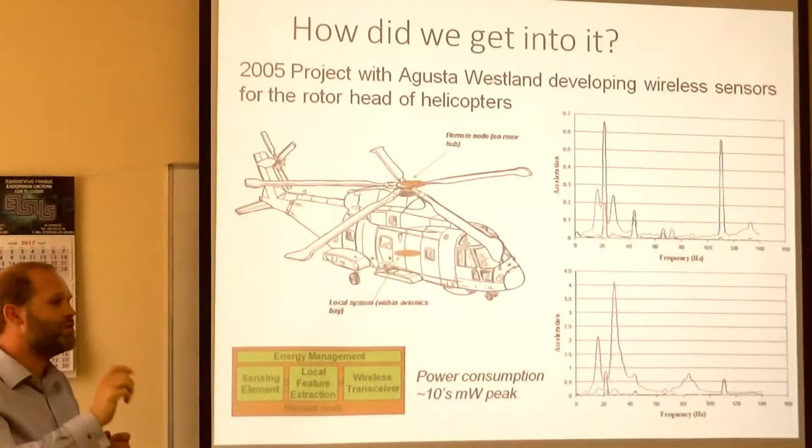In early 2005, we were working with Agusta Westland, a major rotary wing aircraft manufacturer, to monitor the blade, so structural health monitoring of the blades. We were looking at whether we could determine the lifetime, whether we could do health prognostics on the blade. In order to do that, we wanted to put a wireless sensor in the rotating parts that would be embedded for life, for the lifetime of the blade. And then somewhere in the avionics bay, we would have a data concentrator collecting wireless data.

We had an architecture, so there was some sensing element, some sort of feature extraction that was correlating what we measured with wear on the component, and then a wireless transceiver unit. This had consumptions that were in the order of tens of milliwatts, sometimes high tens of milliwatts.

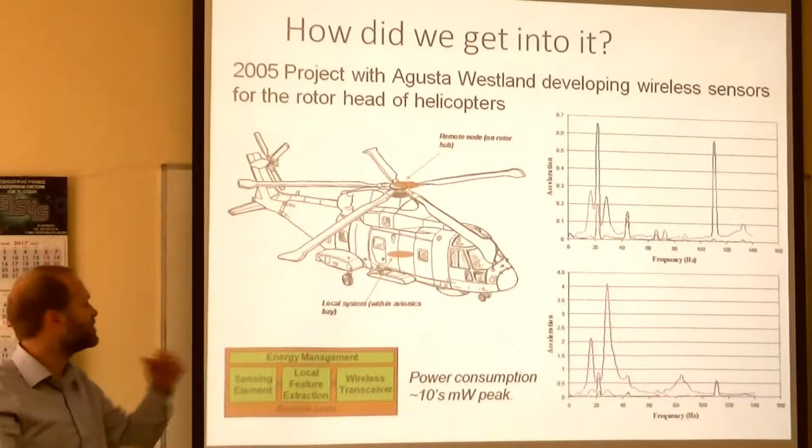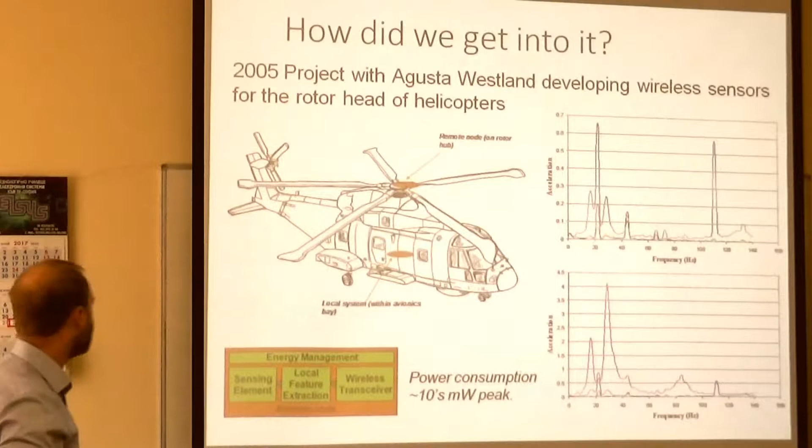When you look at a helicopter, it has a great deal of vibration. So it seemed to make sense that we could use these sort of vibration levels. These two graphs show the vibration measured by the helicopter airframe, and you can see that in certain locations here in pink we're getting up to 4G of acceleration at multiples of the blade pass frequency. So it's a very energetic environment on board the helicopter.

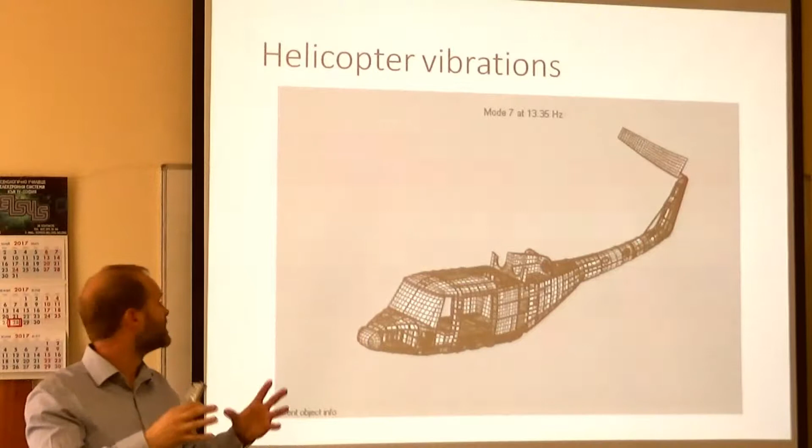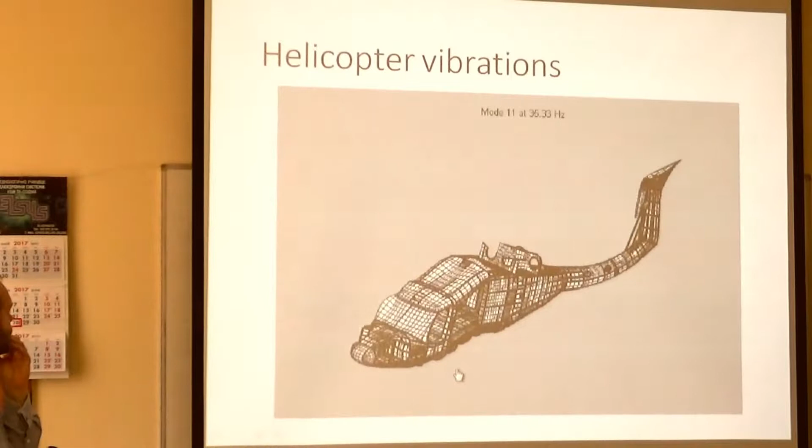I like to show some videos that aren't directly connected, but they are kind of interesting, just to reinforce this idea that helicopters vibrate a great deal, and it's necessary to design the structure to avoid resonances. This is a finite element wireframe model of a Lynx helicopter showing the principal modes of vibration. When you're designing the frame, you try to avoid resonances that are harmonically related to the fixed rotor speed. So these are exaggerated.

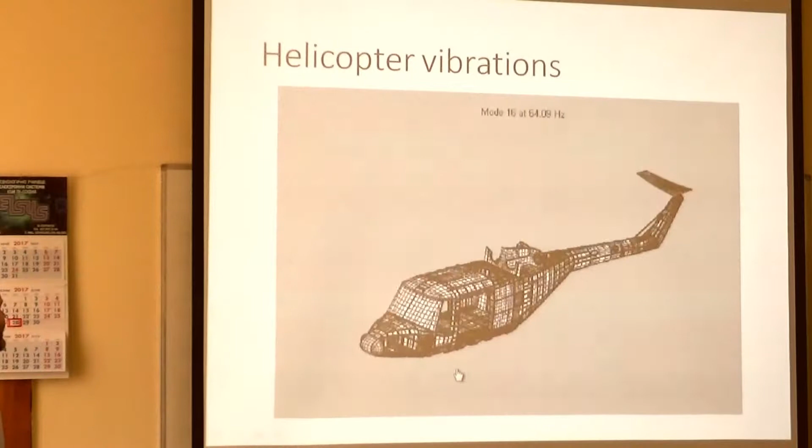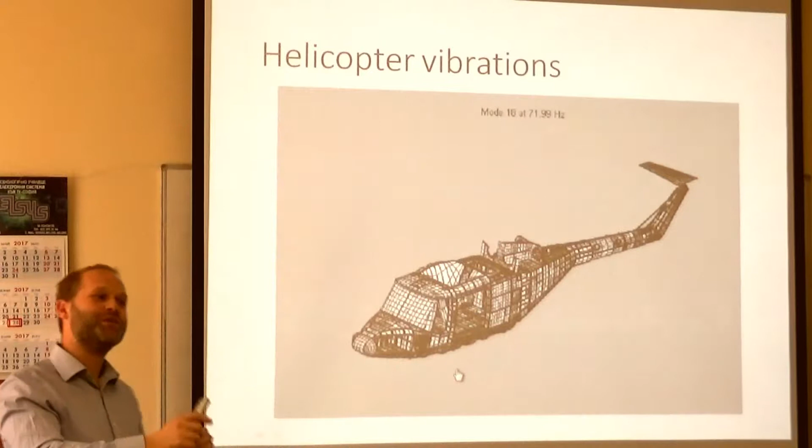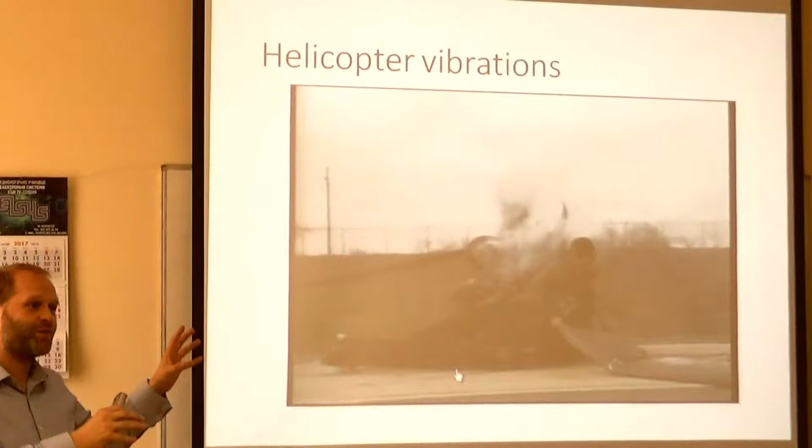It essentially tore itself apart from ground resonance. Incidentally, in normal operation, you would take off to prevent the ground resonance getting to that stage, but because they've tied it down, they were unable to do so. But I hope I've articulated an environment that's very energetic, with lots of vibration, but also lots of safety critical parts that we need to monitor and understand.

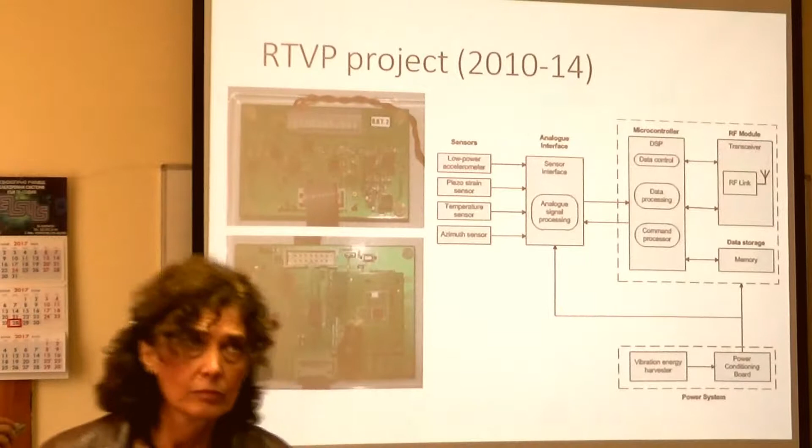This is the electronics that we developed at that time. These are non-flying electronics, but we were measuring things like acceleration. We had piezoelectric strain sensors, temperature sensors, and an azimuth sensor which measures the rotation of the blade.

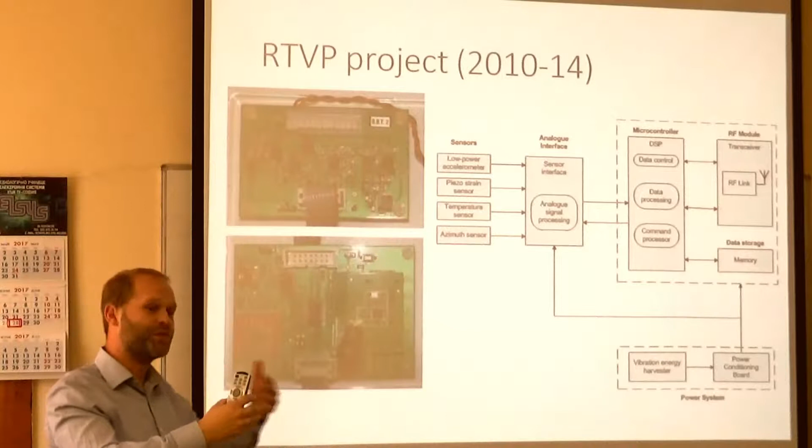To get the power consumption down as low as possible, we would do what we term analog signal processing, but really that is filtering, so narrowband filtering to select particular frequency components from the signal. And then we went into a microcontroller, based on a Texas Instruments MSP430, which would run particular algorithms. So we were looking at synchronous time averaging, which is a type of time domain comb filtering operation, and also running other frequency domain algorithms to extract components.

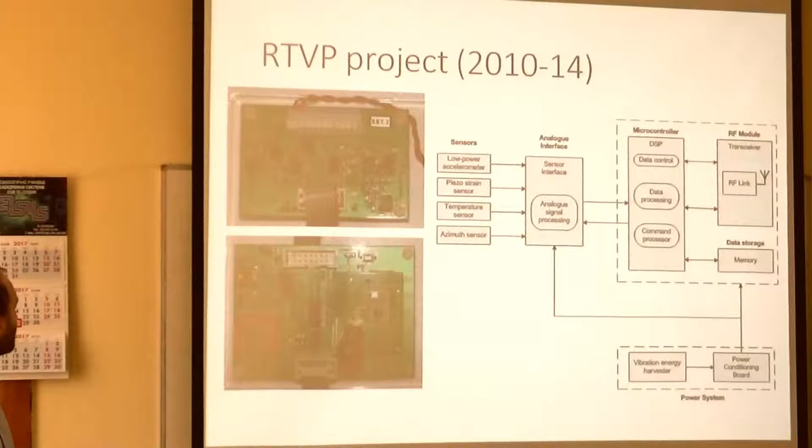And we wanted this to be powered by energy harvesting, but we'll talk about why we wanted it to be power harvesting in the next few slides.

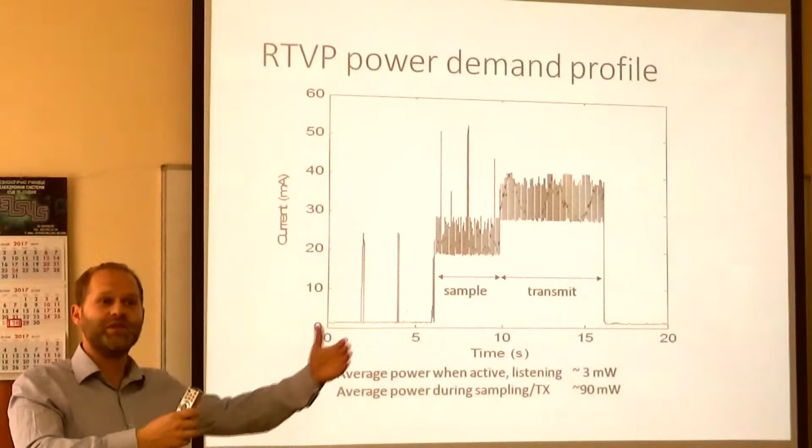But it meant that the average power when it was active is about 3 milliwatts, so over the long term a 3 milliwatt power consumption. And when it was sampling and transmitting during this 10-second period, it was about 90 milliwatts. But we might do that sampling and transmission once every minute or once every 2 or 3 minutes, depending on what we have. And so now we have some figures.

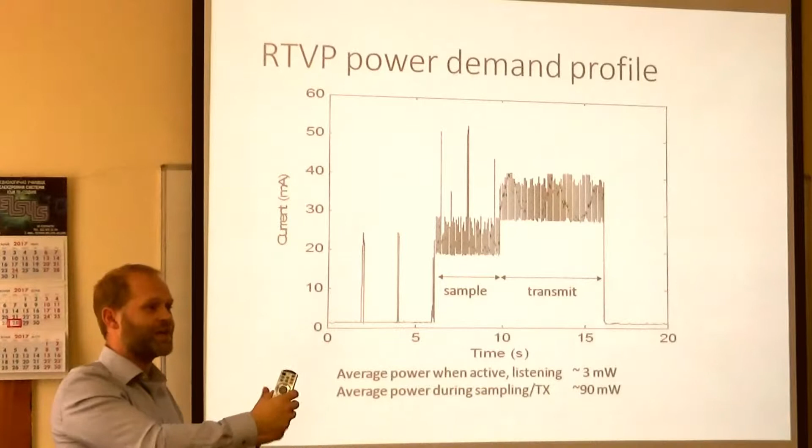We can do an interesting exercise to say, how could we power this other than energy harvesting? If we wanted to use an electrochemical battery, what numbers fall out?

So the design life of a blade is about 1,000 hours, something like that. So we would like our embedded electronics to last for 1,000 hours without intervention. We're assuming that our wireless node, wireless system can sleep in between flights. Now, if you have worked in this field, you know that's not necessarily realistic, because waking up wireless sensors is difficult and obviously consumes power, but let's be as generous as we can, and let's assume that we can make our node sleep between flights.

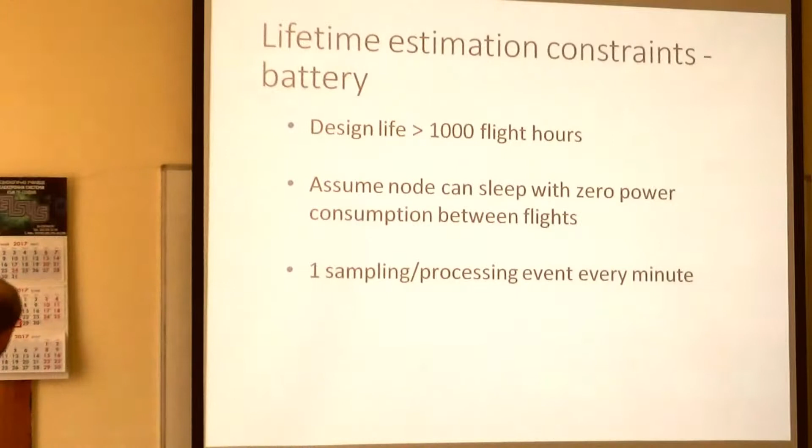And we're going to do one sampling, processing, transmission event every minute. So if you work through those sums, you end up with a lifetime consumption of 17 watt-hours for this electronic node that we would like to embed within the blade.

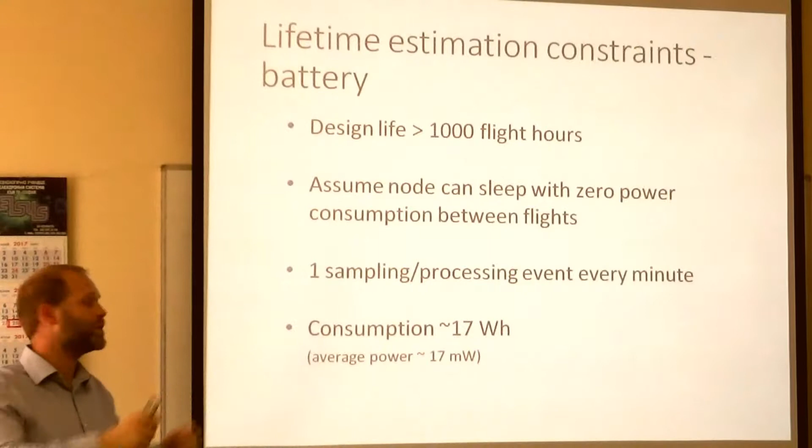So what does that mean? If you're doing it with a cell, then in theory something like this, a lithium thionyl chloride D cell, will suffice, and that has 45 grams and 26 milliliters of volume, which maybe seems like that's possible.

But remember, this is a pulsed load, and it's living on the rotor head, which gets very hot and very cold. So when you derate the temperature and the pulse load, you actually need 4 of them. So that's quite a large size.

Now you might also have some concerns about using lithium thionyl chloride, which is a gel-type electrolyte, on a system that is rotating. You're having centrifugal forces acting on the battery. So if you went to a solid-type electrolyte that are suitable for high G, like a lithium metal oxide, you would end up with 48 AA cells to provide that 17 watt-hours. And so it would weigh nearly a kilogram and have a volume of nearly half a litre.

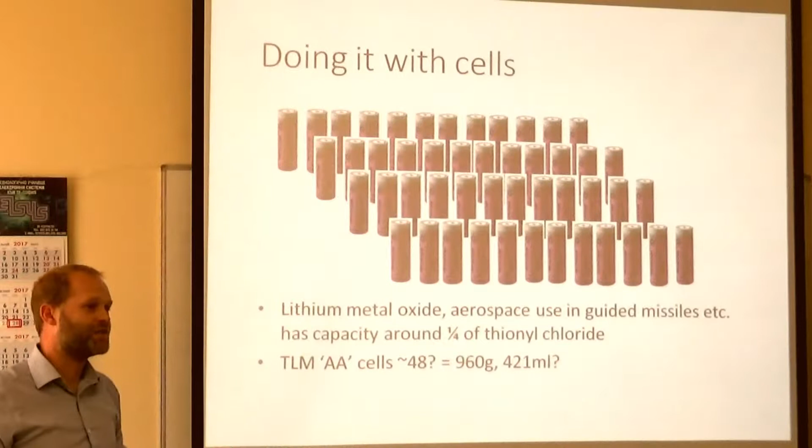So that is clearly impractical. So if you want to embed electronics within a structure and give it a long lifetime, using primary battery cells is not an option. We need to look for another power source. And this is why energy harvesting is a very desirable thing, even if the technology we have to implement it isn't perhaps as great as we would like.

So back to the helicopter, one of the really good things about helicopters for energy harvesting is that they have all those resonances. The rotors turn at a fixed frequency, and so we can design a vibration energy harvester to work at one of these resonant peaks that we can identify. The sorts of power level that we require, in the tens of milliwatts, mean that MEMS is too small.

So we can start to look at a mesoscale construction, which is more conventional wound coils and magnets. So it's quite easy to build. It's an easy application for energy harvesting. We're making things as easy as possible.

If you crunch the numbers, with a 10-gram seismic mass being excited at 20 Hertz with 1 G of acceleration, and you allow that mass to travel through 10 millimeters, you end up with 30 milliwatts of power being produced. So the numbers seem to stack up.

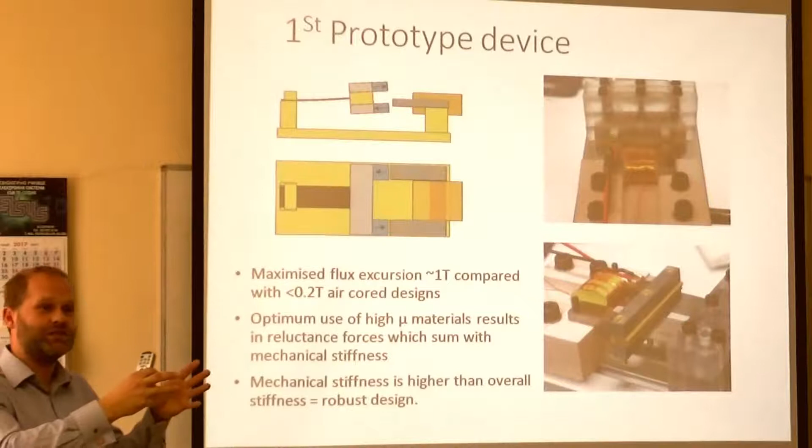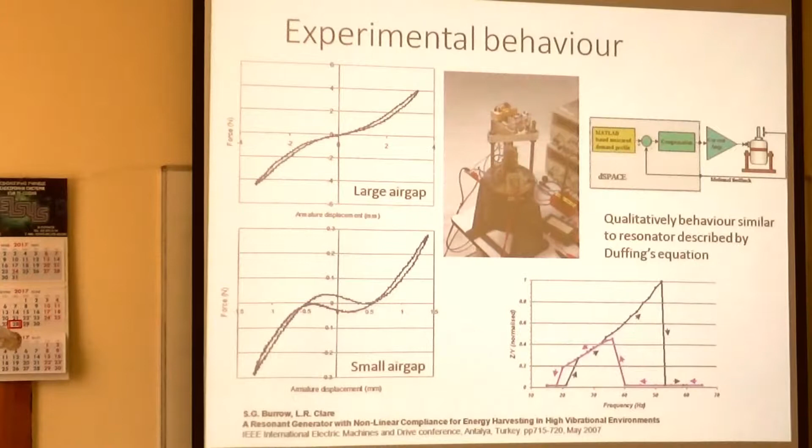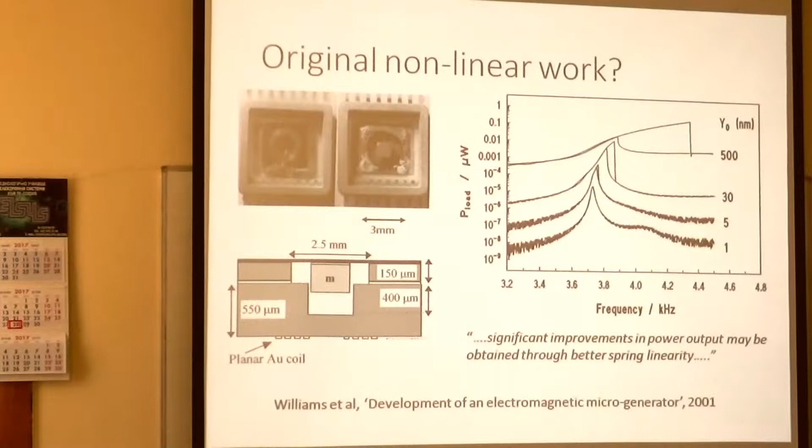So we built a second prototype to try and explore this, and the hypothesis at this time was perhaps this curved over frequency response could be beneficial because it superficially appears to have a wider bandwidth than a linear oscillator. Maybe this response is really useful.

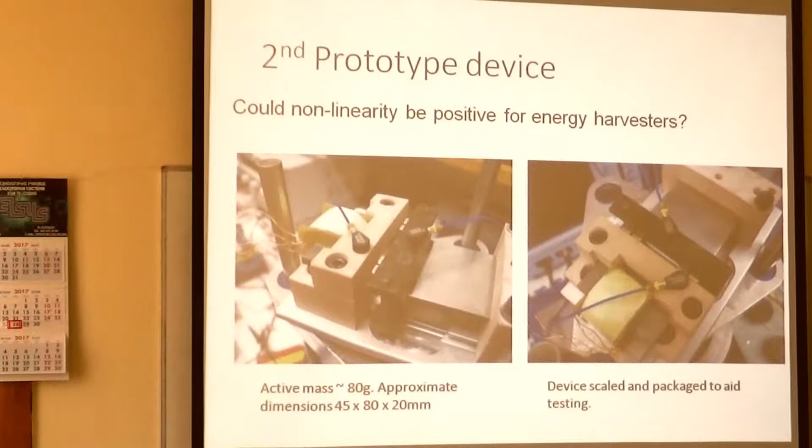So this was a second generation device. It was built quite large so that we could instrument it with minimal effect on the experiment. But it was really about whether we could find a positive aspect of this nonlinearity, not just view it as a negative characteristic.

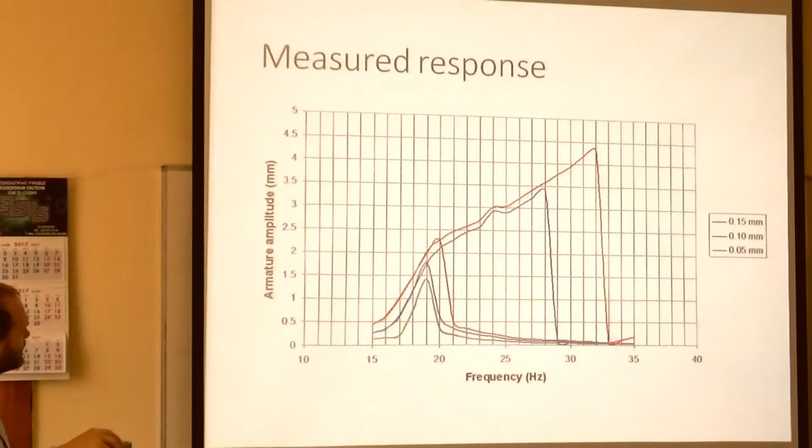In practical experiments you don't see this unstable branch, which is why this red curve, if you plot it all out, would have this unstable branch which curls back round down to here. But in physical experiments you don't see that, you just see a drop down, and then as you carry on in this direction you see a jump up.

So the big thought was perhaps we could use these harvesters for multi-frequency harvesting, and we did at that time some rather quick and dirty numerical analysis. We took the harmonic components that we had in our helicopter signal and put them into a numerical model, and it appeared that we would get more energy harvested out than we would from a linear oscillator.

It turned out that although we published that and it created some discussion, it later proved to be an erroneous assumption. If you've ever worked with nonlinear oscillators, you'll know that the phase relation of the components presented to it is critical in order to understand what it will do, and we hadn't sufficiently controlled for that.

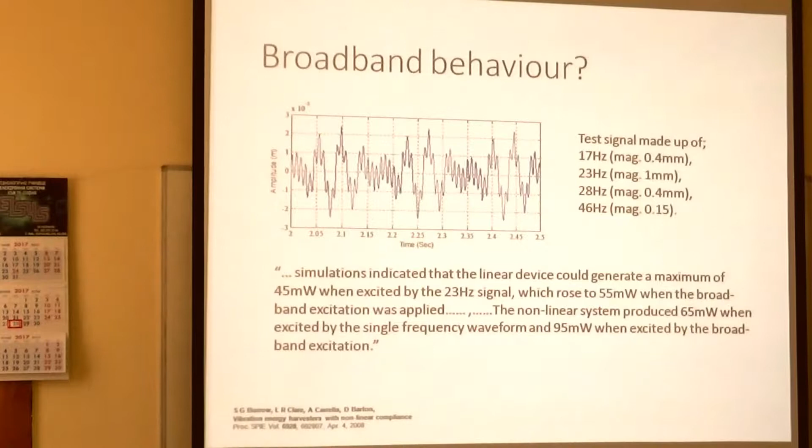So at this time, around 2007, it turned out there were lots of researchers, often from the dynamics community, working on these as well. Einar Halvorsen, a big name at the PowerMEMS conference, was working on it independently, and others - Brian Mann, Abdel-Rahman, and Dave Quinn in the US, and Francesco Cottone in Italy - were working on similar systems with similar characteristics.

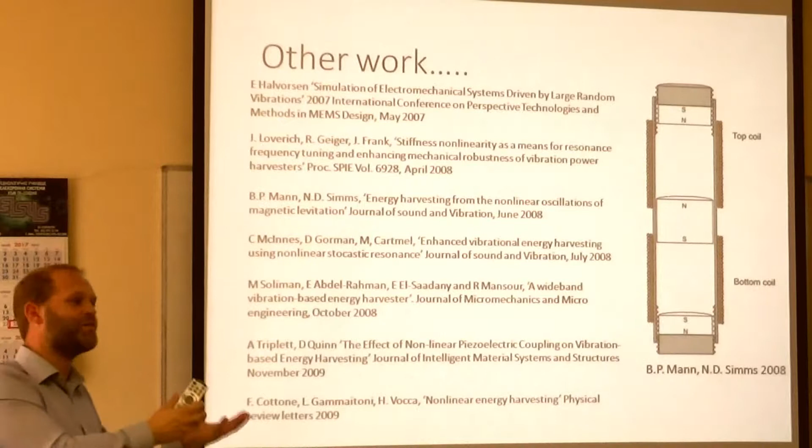This is the Brian Mann and Neil Simms device - they were creating their nonlinearity purely through magnetic suspension, and this was the part that created quite a level of interest in the dynamics community, this idea that we had found a really positive use for nonlinear oscillators. Since then there have been literally hundreds and thousands of papers that have come out.

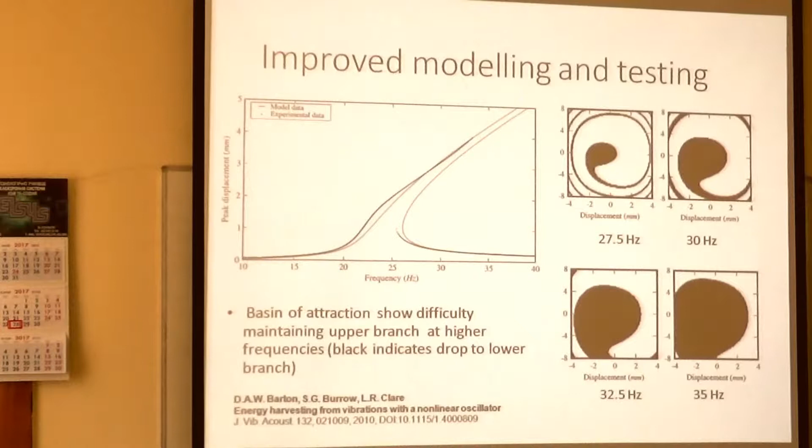We then started to look at random vibrations in a more controlled way, broadband vibrations, and what we started to find was the performance was pretty poor.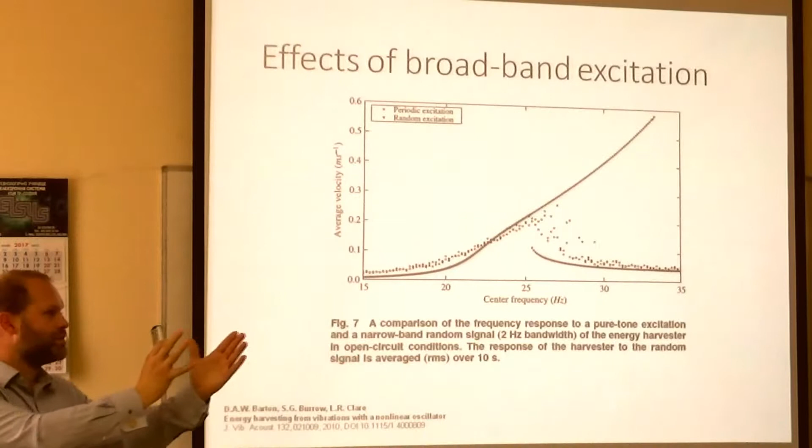This was a system excited by a narrowband signal with 2 Hz of bandwidth. The center frequency was swept, so a 2 Hz bandwidth being swept across the center frequency. This is shown with the dots, the experimental results, and you start to see we've lost nearly all of this resonant branch behavior we were getting previously. The random vibrations acted as a perturbation, pushing it down to the non-resonant branch.

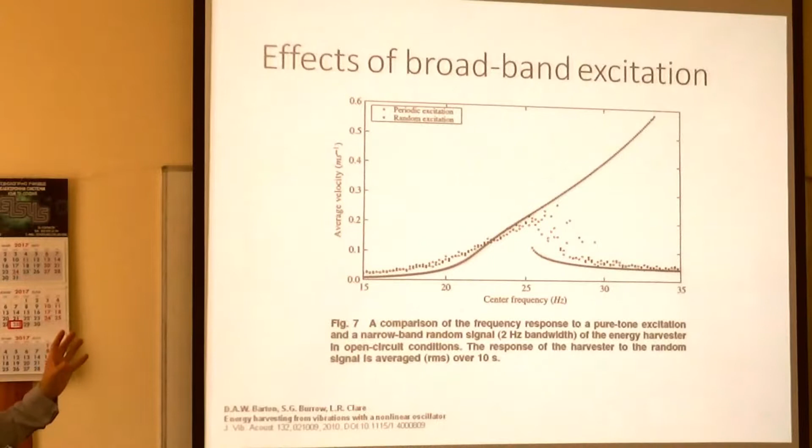It was an unfortunate realization, perhaps, that we hadn't got the broadband harvester we had hoped for.

If you look, this is the widest case at 2 Hertz, and we thought perhaps 2 Hertz is quite a wide bandwidth, so let's look at what happens if we constrain it. We have 2 Hertz broadband excitation, then 1 Hertz, half a Hertz, and a quarter of a Hertz. What we found is that with any deviation in the excitation, even only a quarter of a Hertz of bandwidth, we lost nearly all of that lovely resonant branch operation.

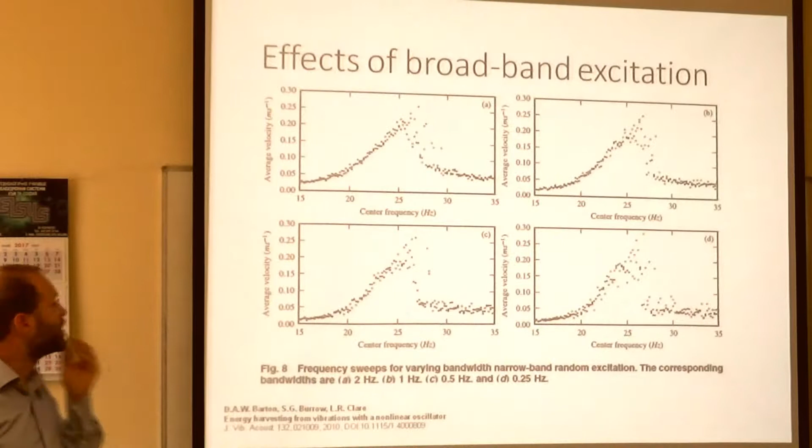One of my students also pursued this and looked at the bistable case, producing some lovely experimental work. This is a restoring force surface for the oscillator, so you plot displacement, velocity, and acceleration as a proxy for force. This is from measured trajectories. Since it's bistable, you see there's a stable orbit around here, and occasionally it can transition to this other stable orbit, and in a higher energy condition it could traverse this whole orbit.

From these restoring force surfaces you can identify some quite nice characteristics. If you take a section through in this direction, we can look at the damping of the system, and if you take a section through here, we can plot the stiffness response of the system.

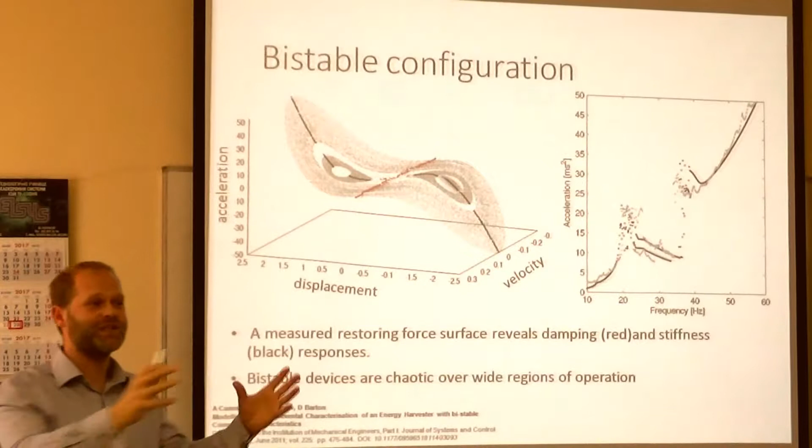What we found with the bistable case is that it was chaotic in many regions. So a frequency response would look something like this, with a chaotic region here and a chaotic region here. But if you looked at the literature at this time, there were hundreds of people publishing on bistable harvesters, really obfuscating the difficulty in analysing these systems and saying they were the next best thing, they were great, when really they hadn't taken the time to analyse them properly.

We then tried to answer this question more rigorously: does a nonlinear harvester have a wider bandwidth than a linear harvester, even notwithstanding the issues we see?

You can simply define for a linear harvester a half power point, the 3 dB power point, and define the bandwidth quite easily. With a nonlinear harvester, you might first think we'd just take this same condition, but you can argue that isn't particularly realistic, and maybe there are actually two cases within that. You can describe that full bandwidth and call it the nonlinear harvester bandwidth, or alternatively you could say let's only consider the stable region, and call that the bandwidth.

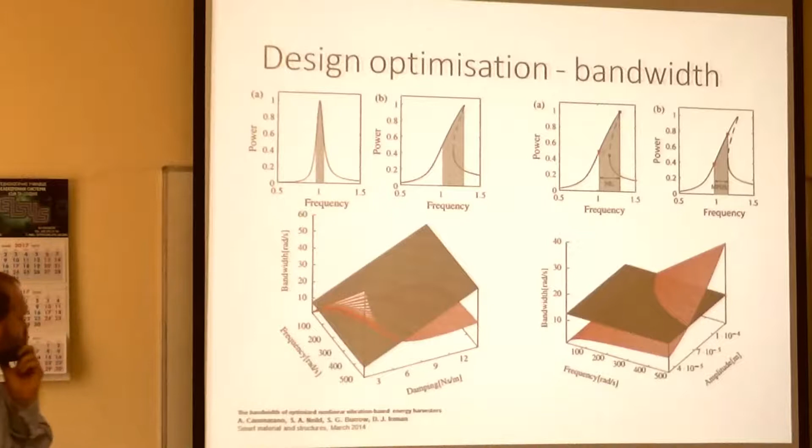We did some work trying to evaluate this. If you took essentially a normalized linear harvester and added in some controlled nonlinearity, you can end up with surfaces that look like this, showing bandwidth on one axis, frequency of excitation, and damping. The black surface is a linear oscillator, which does what you'd imagine: the bandwidth is a function of damping, the standard result, and it's not a function of frequency.

But in the nonlinear case, we find that bandwidth is a strong function of both frequency and damping. It's only in the regions of higher frequency and lower damping, when this red surface is above the black surface, that the nonlinear harvester actually has a wider bandwidth.

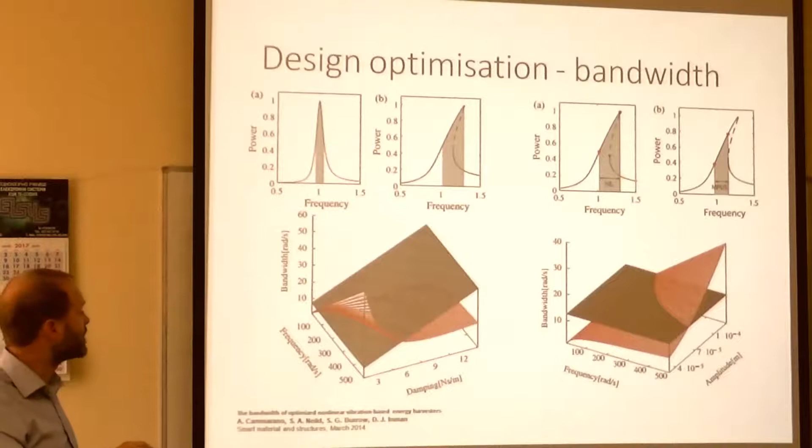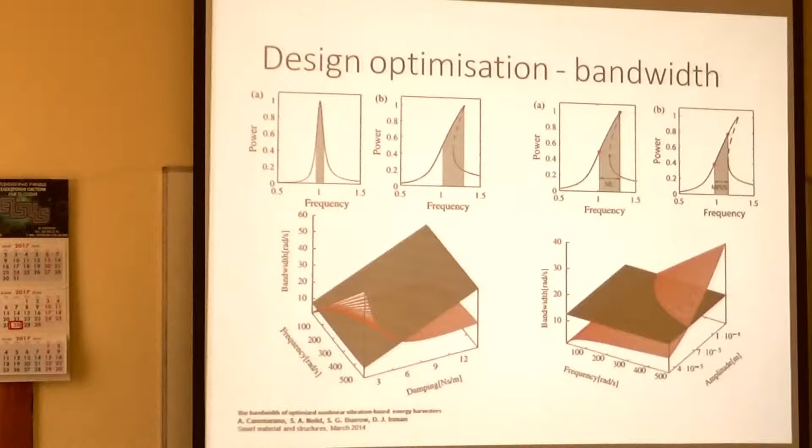We can do the same analysis for the amplitude of excitation. As you might expect, for a linear harvester the bandwidth isn't a function of frequency or amplitude of excitation. Again, for the nonlinear harvester, it's a strong function of both, and it's only in the regions where we are exciting it very strongly and the frequency is high that it shows an improvement. So the clear conclusion was that if you want a nonlinear harvester to have a wider bandwidth, you must always consider the case where you have operation in this difficult to control, multi-stable region.

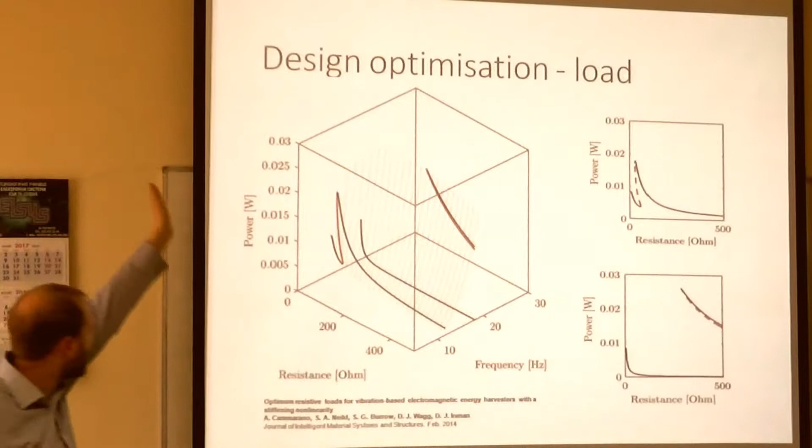We start to see one of the problems with these nonlinear harvesters: we don't have continuous functions anymore for what might become our control variables. So if we wanted to control the output of a harvester, we might alter the effective resistance that it sees, presented by the converter, but that's no longer a constant function. Not only is it not monotonic, but it actually has multiple solutions.

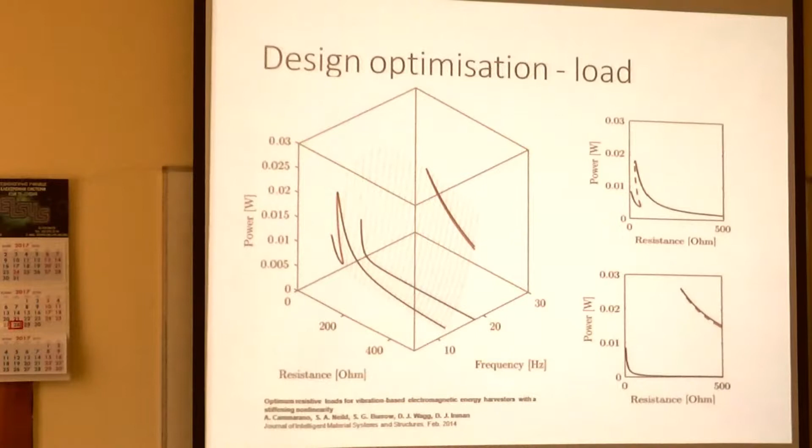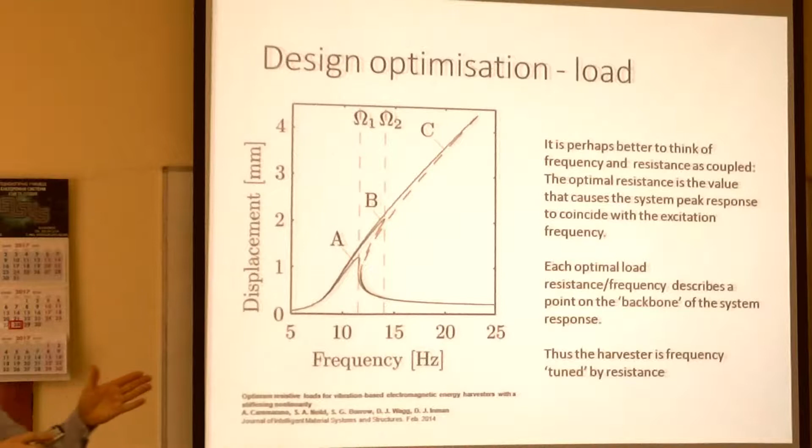Another way to think of this is that nonlinear systems are considered to have a backbone. As we change the resistance, the damping applied to our harvester, we would see a series of curves - A being the highest damping applied, B the next level, C the lightest damping - and they correspond to a load that you would put to extract energy from this. So what we really need to think about is that the frequency at which your energy harvester operates is tuned by the resistive load that you place on the end.

So we've coupled now essentially the resonant frequency with the damping, in a way that isn't coupled in a linear oscillator.

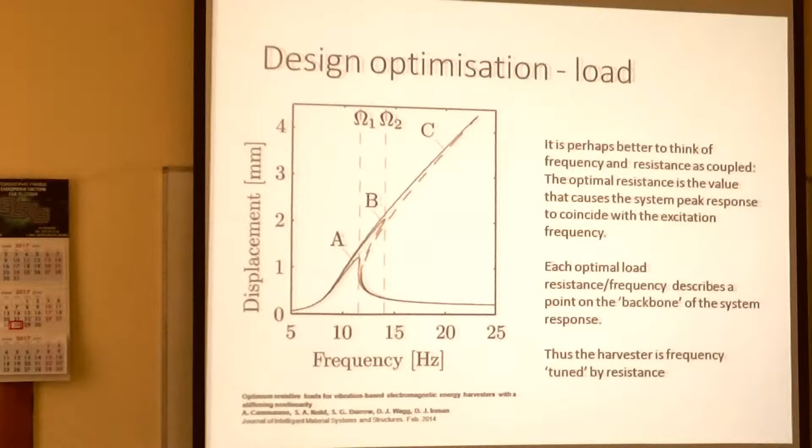Just to recap where we got to - and this was about maybe 10 years of research and a team of 3 or 4 people to get here - we know that a nonlinear harvester is only broadband with respect to a single frequency which changes over time. It isn't broadband with respect to multiple frequencies being presented together. But it still might be useful. There may be conditions where we might see a trajectory of a frequency, but it's a single harmonic.

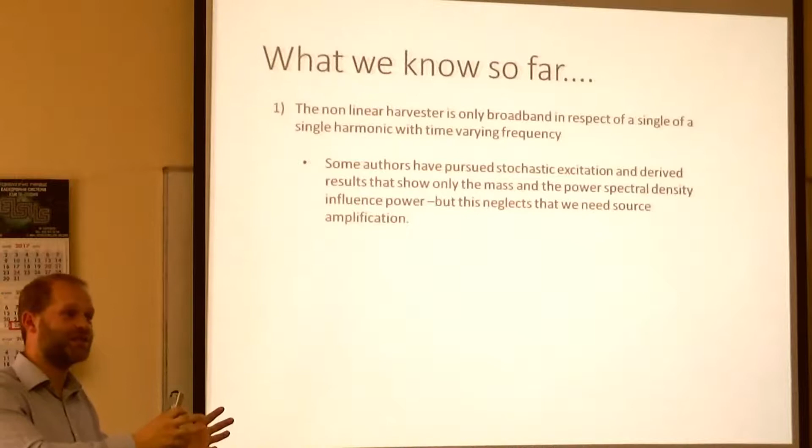Several authors at this stage pursued stochastic models of harvesters, and if you follow that through, you get an interesting result that says the only thing that matters is the mass in the system and the power spectral density of your excitation. But it importantly neglects the fact that the reason we're using a resonant system is vibrations are small amplitude, and we need that larger amplitude of excitation in order to extract energy from the system.

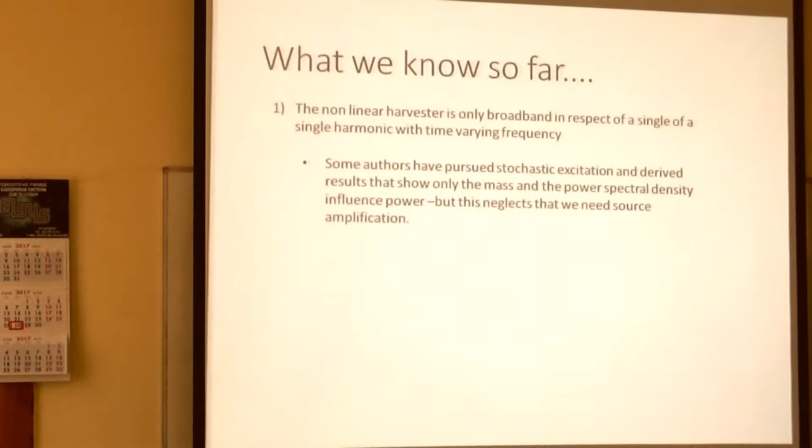We also know that in order for our nonlinear device to be better than a linear device, we need to operate in this difficult region where there are multiple solutions. We know that we can come up with optimal load, as we just showed for steady state operation. But then another thing reared its head: all of this analysis we presented is pseudo steady state. It doesn't consider the transient behavior of the harvester, which actually turned out to be extremely important.

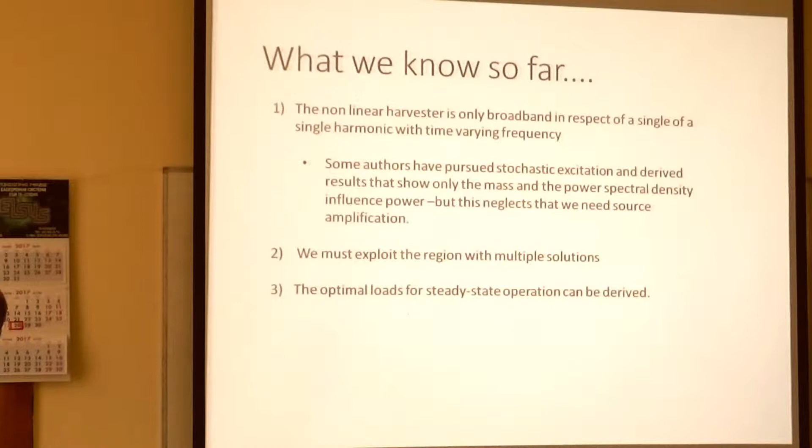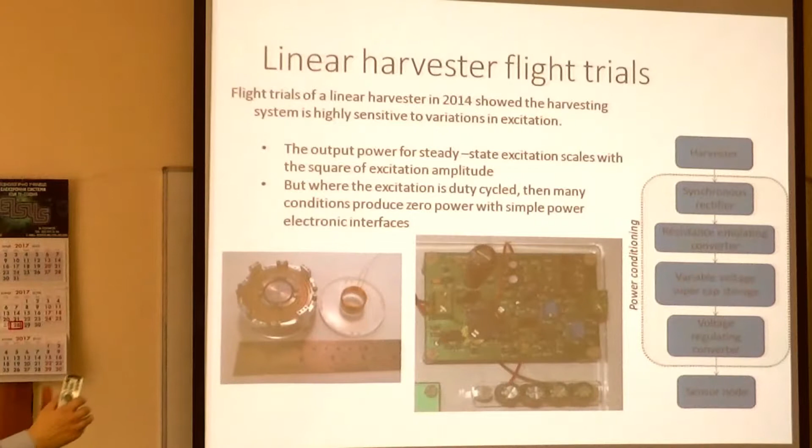We then had a resistance emulating converter, presenting a dissipative load to the harvester. We then had a variable voltage, a store, the supercap, and then a voltage regulator, feeding the sensor. This was operating around that milliwatt to 10 milliwatt power level. It was all built from discretes.

One of the issues at that level is you generally need to make your magnetics large if you want high efficiency. So we could get high 80% efficiencies even at the milliwatt level by having large magnetics. Our harvester looked something like this. The seismic mass is determined by the amount of energy you want to get out, from fundamental physics.

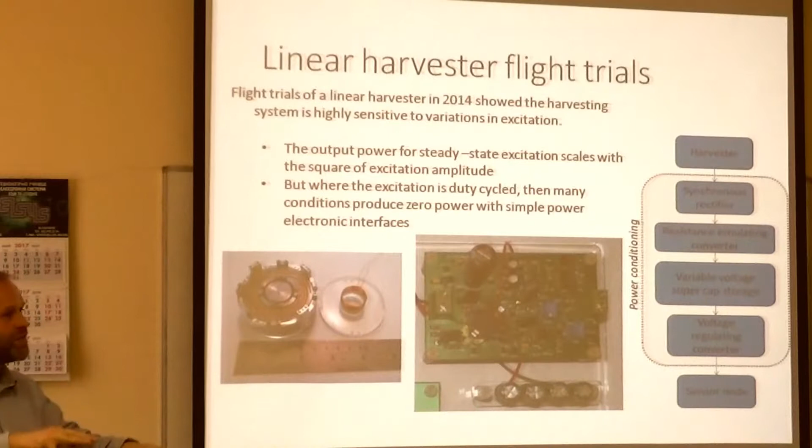The flight trial of this that flew on a helicopter didn't work. What was found is that the power system periodically browned out during flight, and it turned out that the power system had been designed with steady state excitation, but in real flight the vibration level fluctuates, and that was causing the system to brown out, and then it wouldn't restart.

It turns out that the dynamic behavior of oscillating systems and the associated power converter was causing a lot of problems here. This is a fairly basic graph of energy harvesting from damping oscillators. This is load resistance and this is load power. These peak power curves are really familiar to all undergraduate engineers.

But if you look in a system that has energy storage, like an oscillator, and you start to look at changing either the input or the output parameters, there's a trajectory that the system follows to get from one point to another. And that is different to the quasi-steady state trajectory.

So the example we've shown here, this is the reference excitation in terms of frequency and amplitude. If you change the frequency of your system, let's say you're here and the frequency increases by 5%, you want to transition to this curve. This is a quasi-steady state curve, and you want to get to this point here, and you'll have to follow this trajectory. If your frequency is decreased, then you would want to be following this trajectory along here.

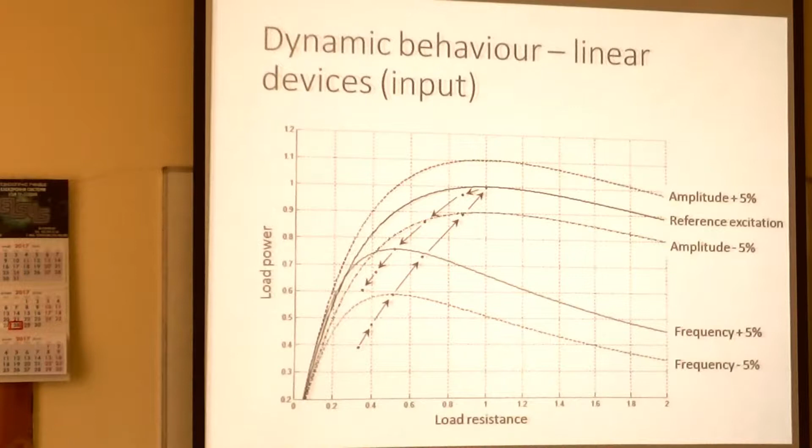This analysis is difficult enough with linear systems, but with nonlinear systems we hadn't found anyone who looked at these trajectories of parameters as you varied input and output parameters.

This is some experimental work we did. We were looking at designing a maximum peak power tracker, and if you've looked at maximum peak power tracking from systems with energy storage, like a wind turbine and so on, you may understand that your system can seemingly extract a lot of energy by stalling the energy source.

And this is an example in vibration energy harvesting. So the same load resistance versus power. The quasi-steady state is shown here in the thick black line, and these other lines are paired trajectories. This outer trajectory does this, and then like that, and that's looking at the load power when you sweep the resistance.

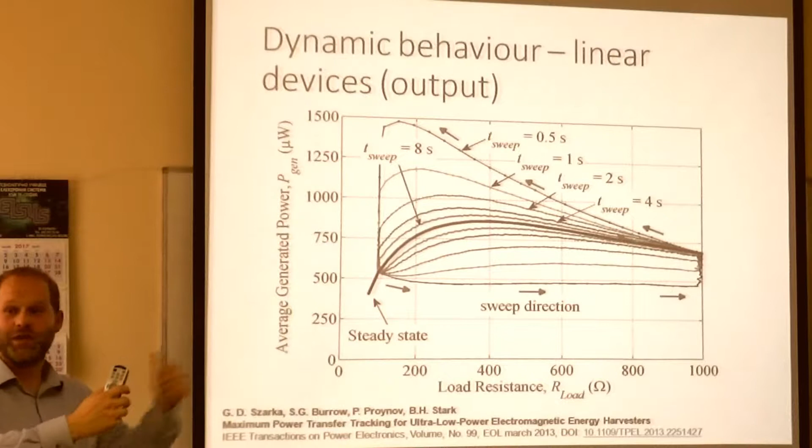So this is sweeping the resistance in 0.5 seconds, going from 1,000 down to 100 here in 0.5 seconds. And what we see is a massive increase in generated power because we are essentially stalling the mass. We are extracting energy that was stored in that mass. And so if you have an algorithm that's implementing peak power tracking, it thinks you're going the wrong way because it's seeing an increase in energy from that.

We took this a bit further and looked at it in terms of an energy harvesting system. We said, let's have a system where, in theory, there's enough energy in the source getting to the sensor node. We showed on the top, this is an example: the system has constant excitation, and it charges up. This is the voltage on the DC supply.

It reaches a threshold, and then this dotted line indicates operation of the wireless sensor node, and it's in a cycled operation. So essentially we have a duty cycled load, but a continuous input source.

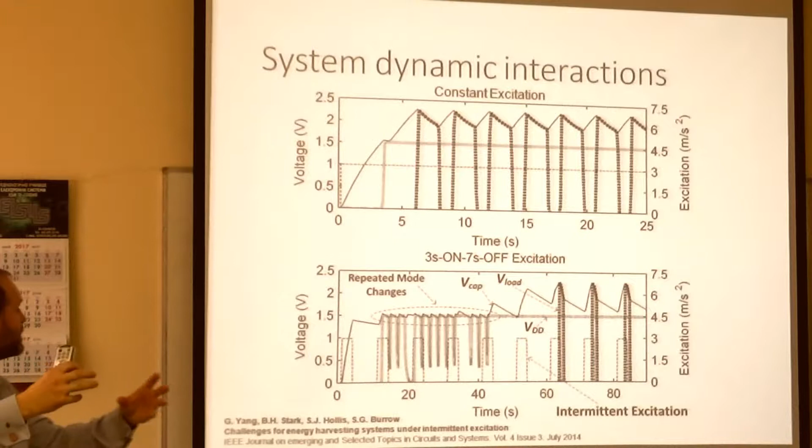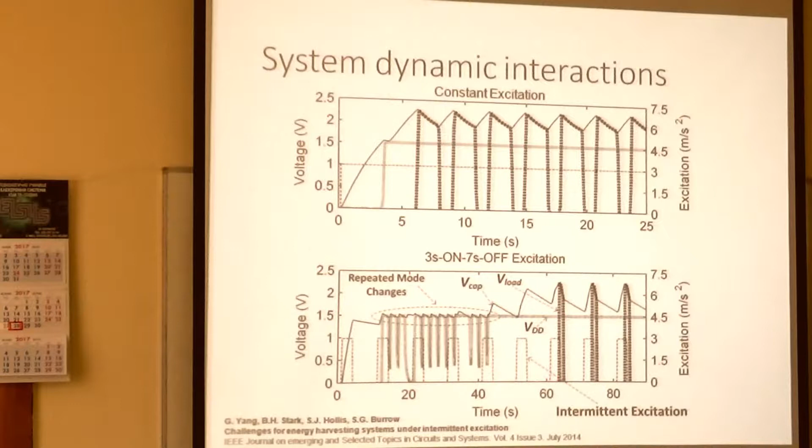We then took that same system and started to duty cycle the excitation, so now we have intermittent energy in and duty cycled energy out. What we found is in a real system, for relatively long periods of time—this is 60 seconds, a minute here, so this is a period of seconds—we could induce operation where the system continually browned out and couldn't operate.

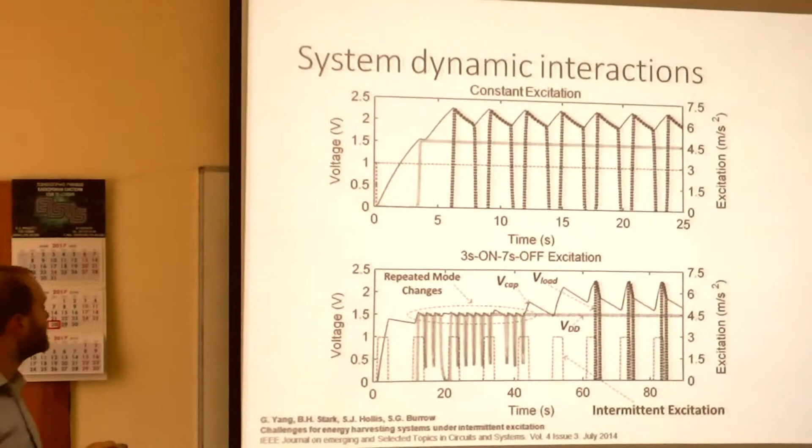This was what we thought was a fairly well-designed wireless sensor node, but it was incredibly susceptible to the dynamic interaction of the source energy and the load. These are the sorts of issues that power systems have all the time, and in energy harvesting we generally don't have the capability to store lots of energy in order to damp out these vibrations, these dynamic effects, to try and isolate the input from the output.

Essentially what happens here is if you have any kind of rectifier, your input impedance is a function of the stored energy in the system, and that creates these undesirable oscillations.

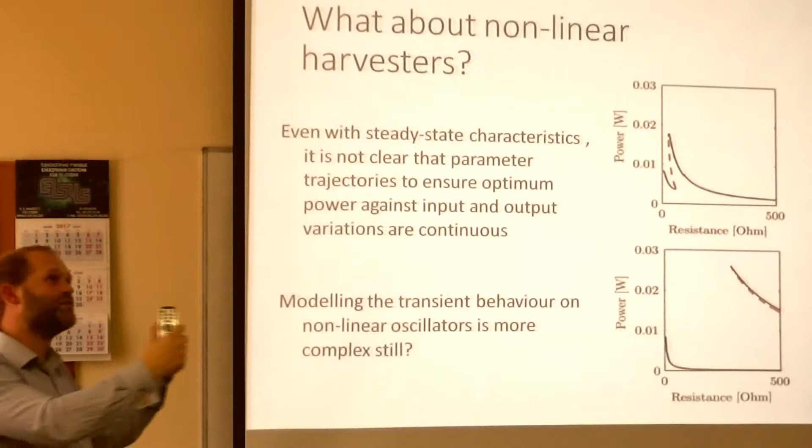So how about with nonlinear harvesters? Those two previous graphs were with linear harvesters. Now not only do we have to deal with these problems in the linear case, we also have trajectories of our parameter that we will control, i.e. resistance, that does something like this. And as yet we have not come up with a good way of coping with a parameter that has three possible states, controlling it and understanding it sufficiently well to design the system.

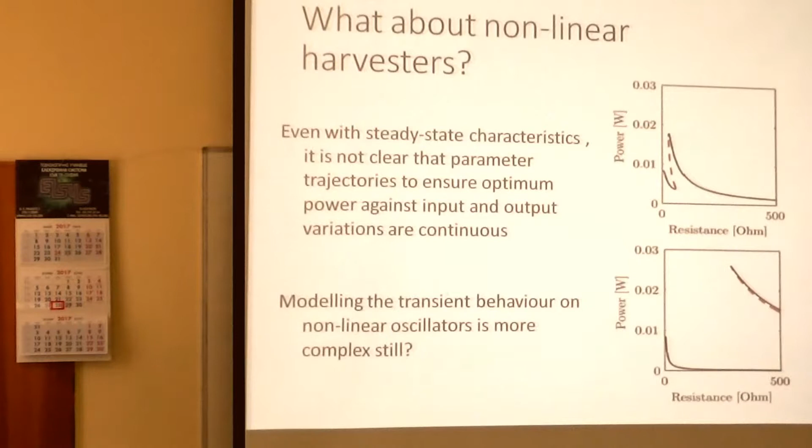So where did we get to? This is what I'm describing to you is a sort of 10 years of work. What we found is that the literature is full of nonlinear energy harvesters. There's a fairly low threshold for entry into doing this. You can just get a mass on a spring and shake it. So lots of people publish work.

Nonlinear energy harvesters are a very rich area for our mechanical engineering colleagues who are interested in dynamics, and they have spent years developing tests and tools to analyze these. So they were producing a lot of these papers without really thinking of whether this was resulting in practical systems at the end.

Very few papers presented a physical device, and even fewer present a device that is designed as a harvester that is anyway sort of packaged or could be considered a standalone device as opposed to just a laboratory experiment. And I would argue that no one has really tried to produce an energy harvesting system that takes into account the dynamic interactions of the source, the energy harvester, the electronic power conditioning, and then the old end wireless sensor node.

But are they useful? I don't want this talk to be too negative. A large part of my research career was spent looking at this. There are some important results. As we saw in the original MEMS work, it's quite difficult to make things that are small that conform to linear approximations. So by understanding the effects of nonlinearity, we're already better placed to work and build MEMS scale devices. We need to understand these, whether we want them to be there or not.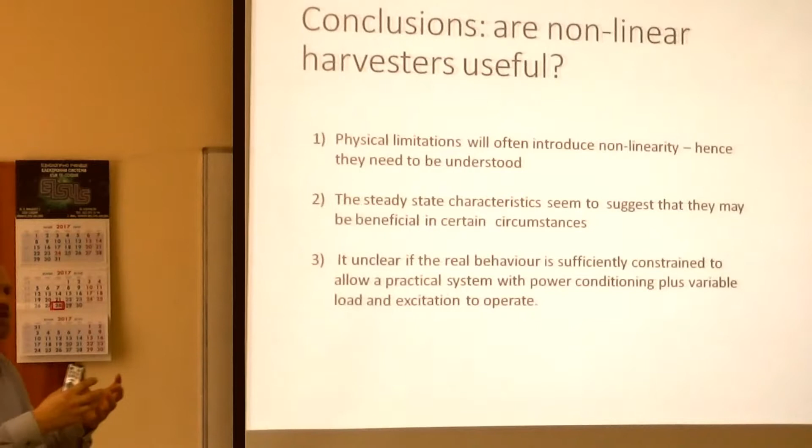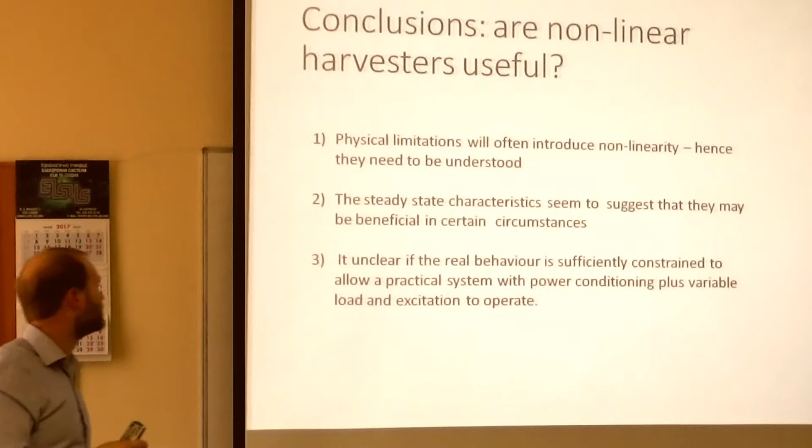And ultimately, it was unclear to us - I put it there rather long-winded - that the real behaviour is so much more complicated than we were considering in our analytical models. And it's not clear that we were able to draw sufficient conclusions from that to be able to design a system, particularly in this case of variable load and variable excitation. And so there we have it. We have a trajectory through, and not necessarily a happy conclusion, but then research isn't always that way.

So does anyone have any questions? Any questions or opinions or something else?

I have a question - why do you choose this kind of approach, the magnetic? That was really dictated by the size. When you shrink down, perhaps electrostatic can be more favourable. Magnetics scale with the volume scaling law, so their effectiveness falls away. Piezoelectric is the other very popular conversion mechanism, but that produces so much capacitance in the output that you spend all your time trying to compensate for that very capacitive output impedance. So although they aren't particularly considered cutting edge, sometimes people look down their nose at springs and magnets, they're often at this sort of scale the right solution.

So, what is your opinion about the future of energy harvesting in industry, in life? In the UK we have a company called Perpetuum who commercialised this sort of scale energy harvesters, and they struggled for a long time. They went for several years trying to find a niche, and eventually they found it monitoring railway locomotives, and they have become very successful now selling a complete system and a service that bolts onto the axle of a railway carriage, and it powers itself from the vibration, and it measures for wheel flats, and it can detect damage to the track. But the conclusion from that is no one really wants to buy an energy harvester. It's too complicated. But they are very happy to buy the services that you can provide with an energy harvester.